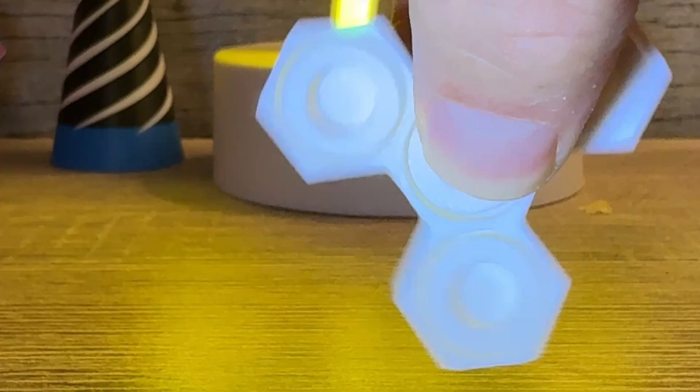What we're going to make today is a small spinning fidget ring that has 3 points on the outside that can be spun, as well as a center axis that everything can spin around to. So let's go ahead and get started in Tinkercad.

First thing we're going to do is come up here to change the name. It will be the last name, first name, and fidget ring.

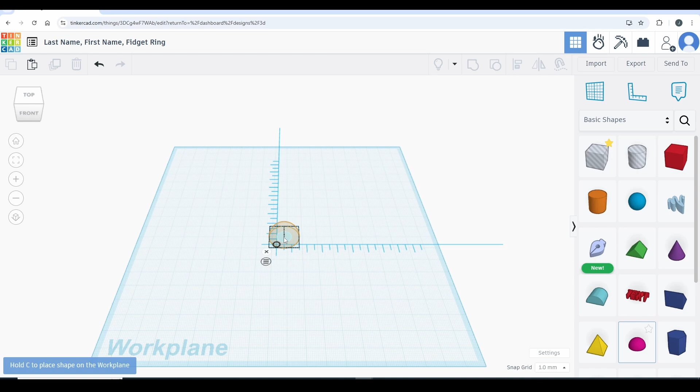We're going to begin by coming up here to the ruler tool. We're going to drag this ruler tool and place it somewhere in the middle here. Afterwards, we're going to grab this half sphere, bring it over, drag it right here, and place it somewhere in the center.

The ruler tool allows us now to move this object or shape in relationship to this origin or center point that we just created. If you look here, when I move it in any direction, these green lines indicate how many millimeters it is up from the center point and how many millimeters away. So if I grab it, I can place it right there, or in this case I'm just going to type in 0 for that green and 0 for this green, so it's perfectly centered.

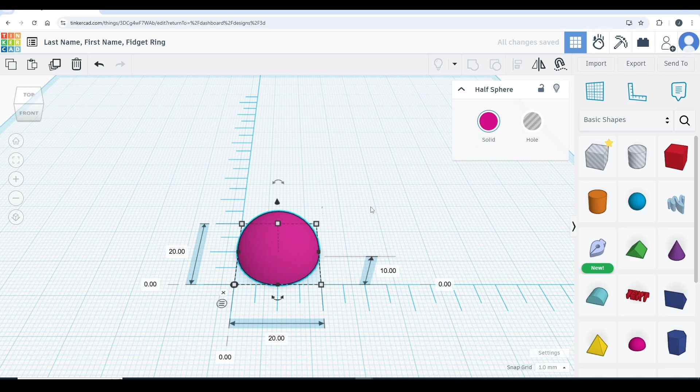Then I'm going to click on these white boxes. I'm going to change the width of this to 14, change the height to 14 and hit enter. Then I'm going to click the white dot on top to change the actual depth. The depth will be 5. Hit enter.

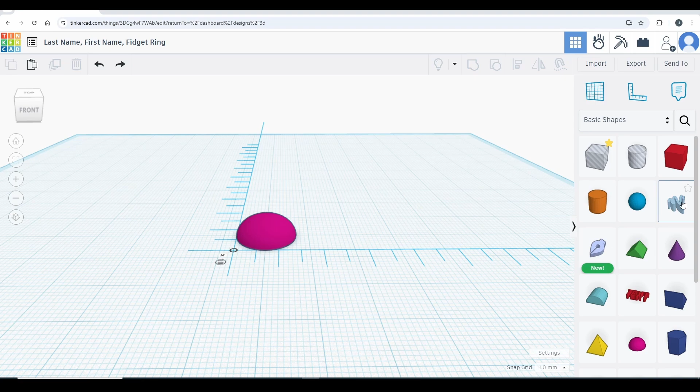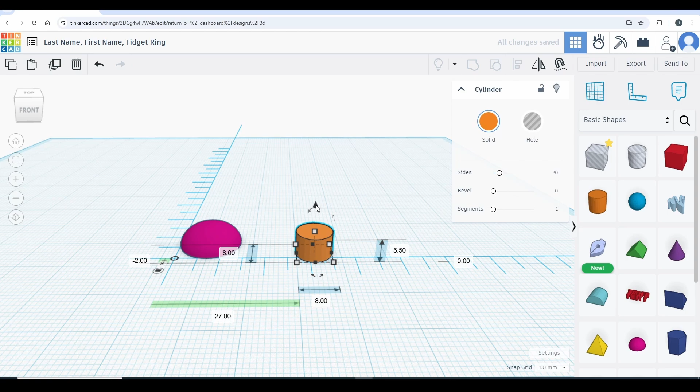Afterwards, we're going to grab this cylinder right here, bring it over. We're going to change its width to 8 by 8, and it will have a height of 5.5, and we're going to grab this black little triangle to pull it up in the air by 2, as indicated right here.

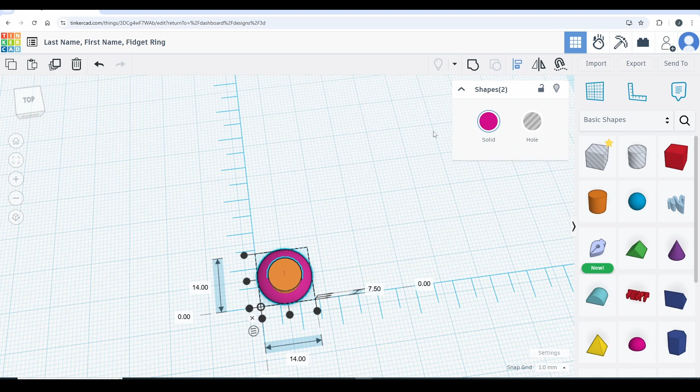Then we're going to take this orange cylinder, we're going to put it right on top of our half sphere. We're going to draw the red box around both shapes. We're going to align them by coming up to the Align tool. Hit the Align center point on the left and the Align center point at the bottom. So now it's perfectly aligned.

Draw that red box around it again to make sure and group it. Now click back on the object. We're going to come up here to the left side where it says Duplicate and repeat, or you can hit Control D.

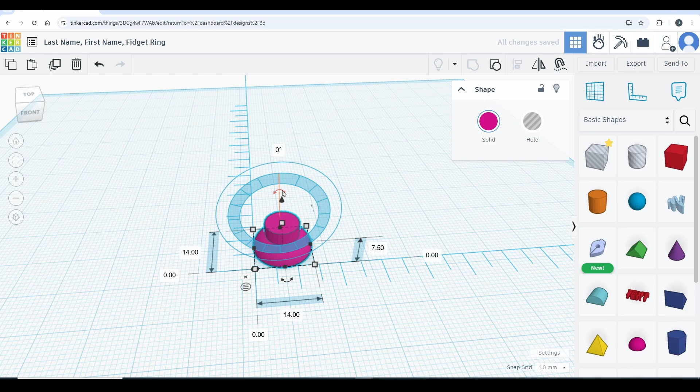It's actually sitting there already for us. We're going to click on this rotation angle tool. We're going to rotate this by 180 degrees, flipping it upside down. And then we're going to raise this new part by 7.5.

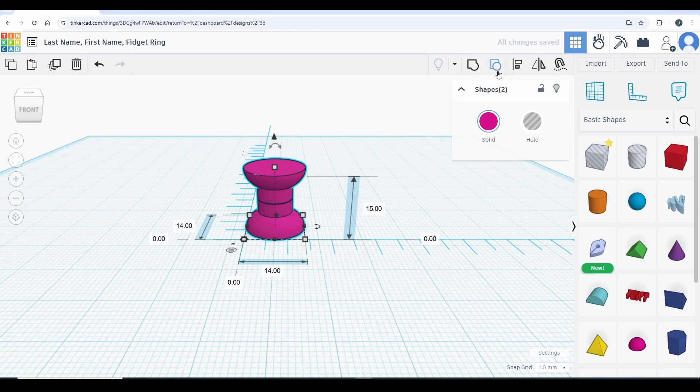Then draw the red box. We're going to group it again, or Control G.

Afterwards, we're going to duplicate this piece by hitting Control D or the duplicate button. Just move it over to the left for the moment. But we're going to come over here to the right, make it a hole.

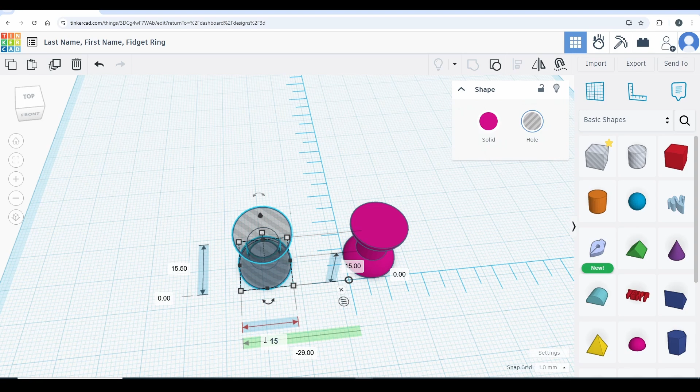And we're going to change the size of this to 15.5 for height and 15.5 for width. Just move it out of the way. We will use that in one moment.

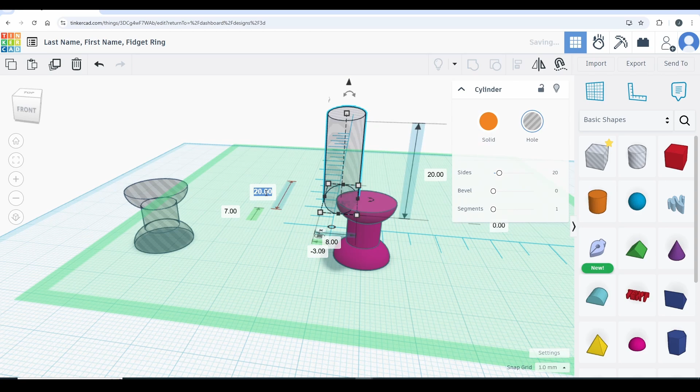Now we're going to grab this whole cylinder. We're going to place it right on the top, and we're going to change the dimensions of this to 8 by 8. Then we're going to drag it down by 2, so we'll type in 13 here.

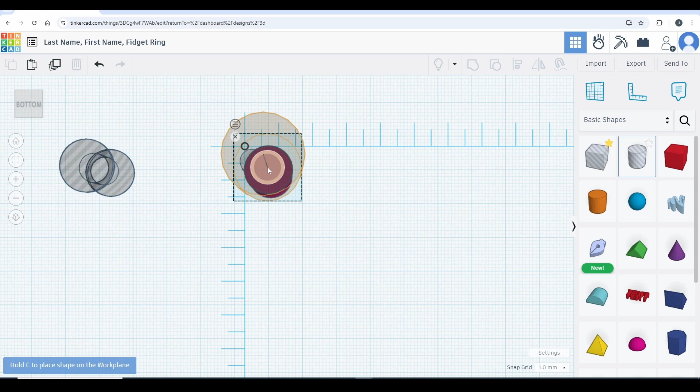Then come over to the bottom side using your camera cube. Repeat that process. Drag another cylinder from here, put it on the bottom of our object. It will have a width of 8 and a height of 8. And we're going to lift this in the air by typing in -2.

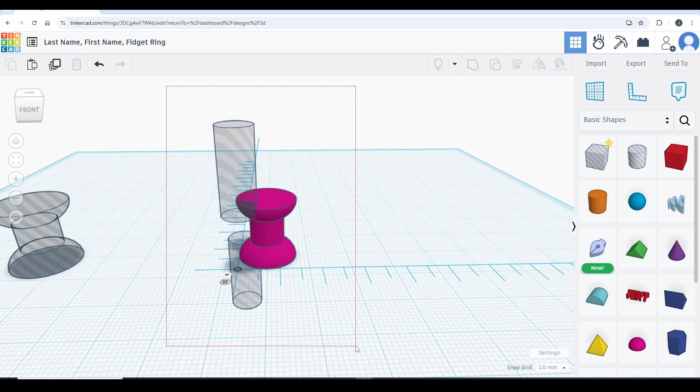And so now we have 3 objects. We have a hole, and this piece right here. We're going to draw the red box around everything, go to a top view, and align everything. We've got the center align point on the left, click that, the center align point on the bottom, click that. Hit group. This will be our axle to spin the fidget ring around.

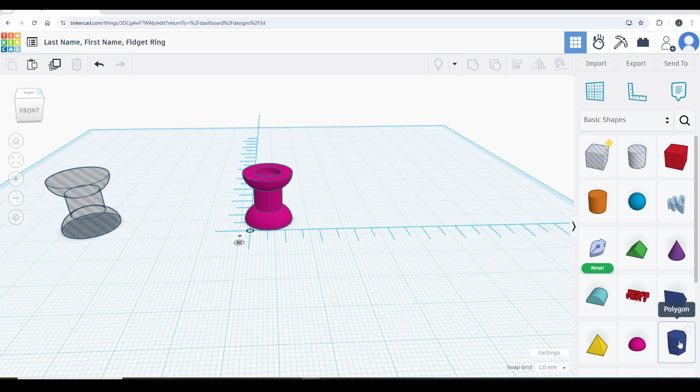Let's go ahead, come over here to the right. We're going to select this polygon. This right here is actually a hexagon. So just drag it over here to the left. Click once on the top white dot. We're going to change the height of this to 15 to match the height of our other 2 objects. Hit enter.

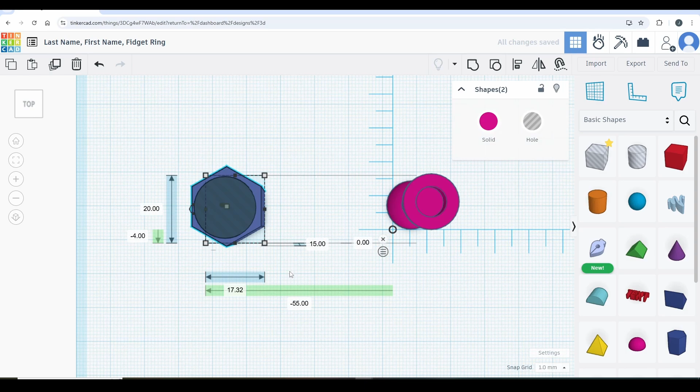Then go to a top view. We're going to move our polygon right over that hole. Draw a red box around both those objects. We're going to align them by hitting the align tool. We're going to use the left center, the bottom center, and then group them.

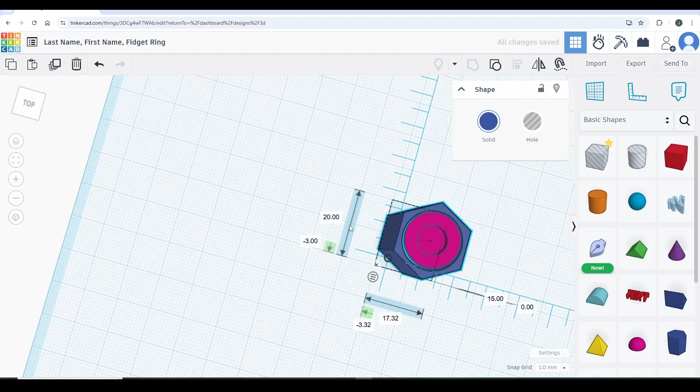Next, move this polygon right over on top of that axle. We're going to draw a red box around them. Then we're going to align them using the left align and the bottom align, and then finally group them together.

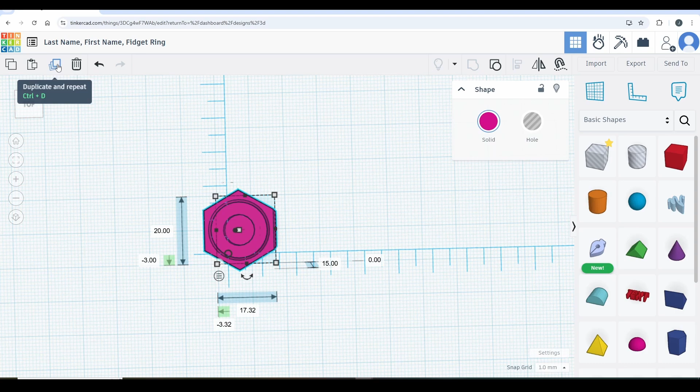With that being done, we are now going to duplicate this piece 3 more times. So 1, 2, 3. So now we're in the home stretch of this.

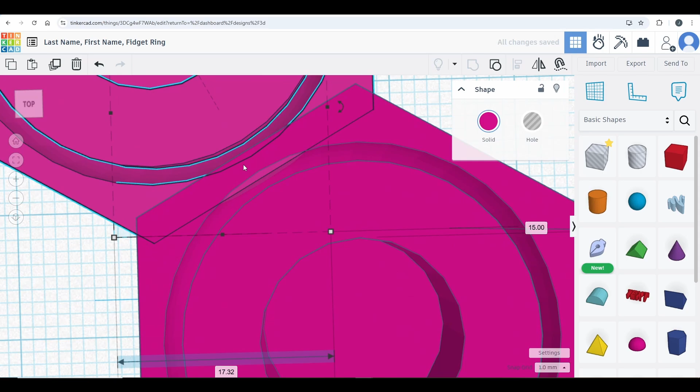We're going to connect these 3 pieces to this main body by pulling them over just ever so slightly. They will start to have a small overlap, as you can see right here.

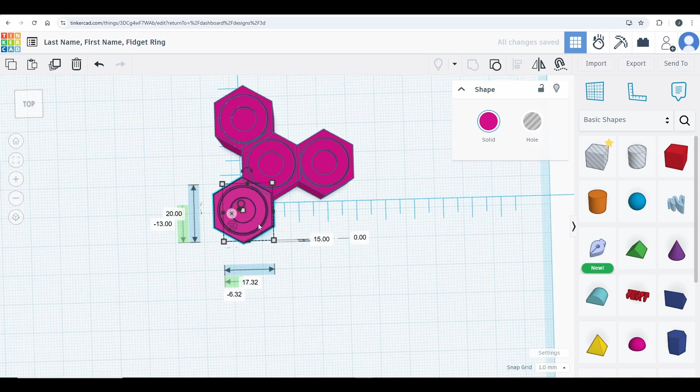We're going to take this one, bring it over, and it will also have a small overlap. And last but not least, we're going to take this final piece, bring it up here, connect it with a small overlap as well.

Then, to successfully complete our fidget ring, we draw the red box around everything and we group it. Now we have a nice fidget ring that you can spin.